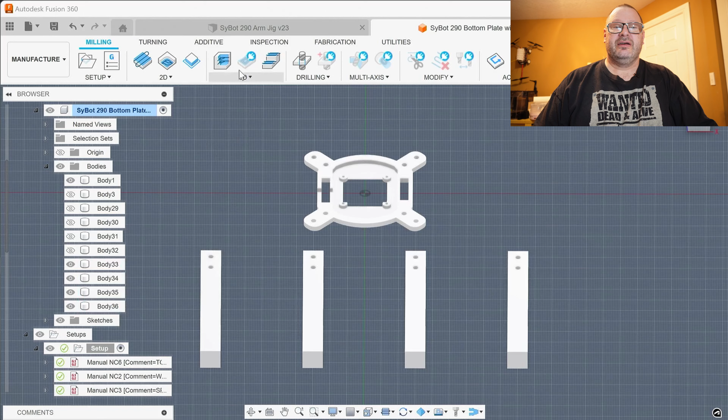Now if you're new to CNCing, which I actually am as well, you might be wondering how it is that I hold these arms in these locations for the CNC to do its thing. So that happens here. This is the arm jig. So you'll see this square, the arms are mounted in here. You'll see this square cutout, and that square cutout mates perfectly to this.

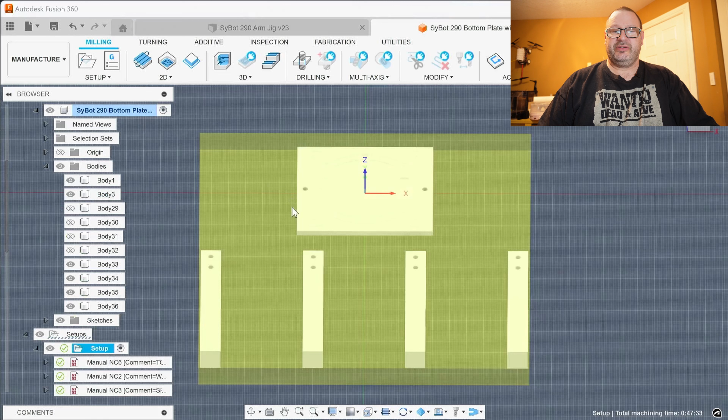So you lay the carbon fiber sheet down, the CNC cuts this out. It may cut out some other stuff. I think it asks you to pin the outsides first. But at some point in the process, this fits directly over top, and you'll see that the work XY home positions match. So therefore, once you install this jig over top of that carbon fiber, then the CNC knows exactly

where these armholes are. The next thing you might be wondering is, why does this jig have sections that come through to the back and channels that don't? So let me just describe the arms. The arms are a 12 millimeter diameter carbon fiber colored tube, but the walls are only 1 millimeter thick.

So in these locations, in the top and bottom plates, where these bolts come through the arms, along the very top and bottom of the arms, all of the pressure exists for this clamping force of the bolts. These are only 1 millimeter thick tubes, so they're not that strong when it comes to that sort of pressure. Really, the only way I could get around that would be to have proper tube clamps, and then you would have something a lot bigger and a lot heavier, because I think then you would need to probably have metal.

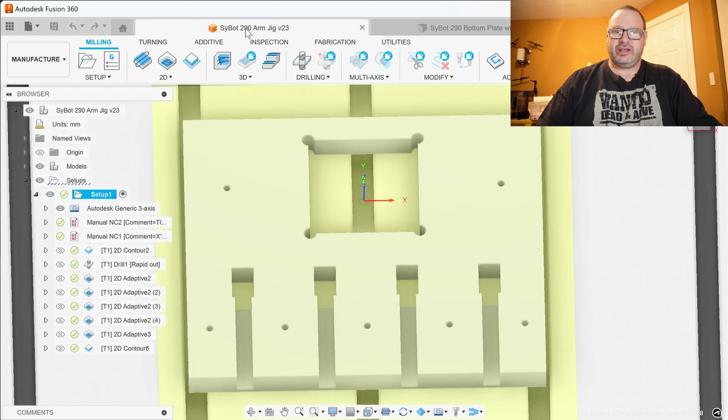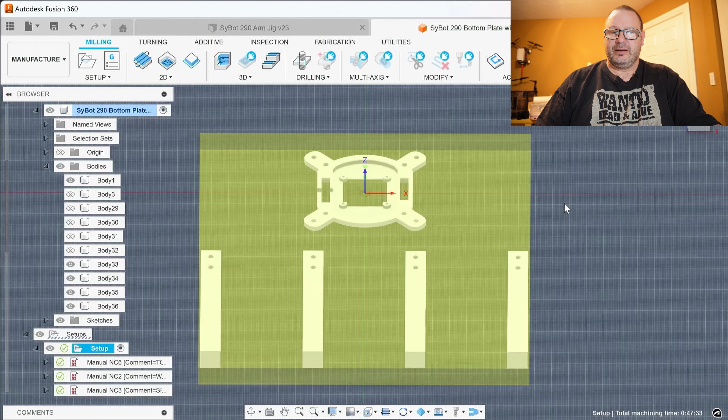So back to the jig again for a second. Those 16 millimeter diameter pieces are made to fit right down inside of here, which allows the 12 millimeter arm pieces to go right down against the bottom of these channels. So that's the why of that. I'm not going to go over the sequence today. What we're going to do is prepare the arms so that they are ready, and then we will do all of this at one time. And at that point, I'll go over the CAM sequence.

So we will get a piece of colored carbon fiber tube. I'm going to go with green because the MEPS motors that I have for this are like a teal, but it goes pretty good with green. We're going to cut that into 4 approximately equal lengths. Then we're going to get a piece of 16 millimeter diameter carbon fiber tube, and we are going to cut 4 20 millimeter long lengths off of that.

We're going to glue the supports onto the arms, and I'm going to use some black pigment in the epoxy. It just looks a lot better than that pale yellow look that you get from epoxy. It makes it day and night. And then once that's dry, we can fit the arms into the arm jig, and then on the next video we'll actually mill it. So it will be all ready to go. Okay, so let's do some cutting.